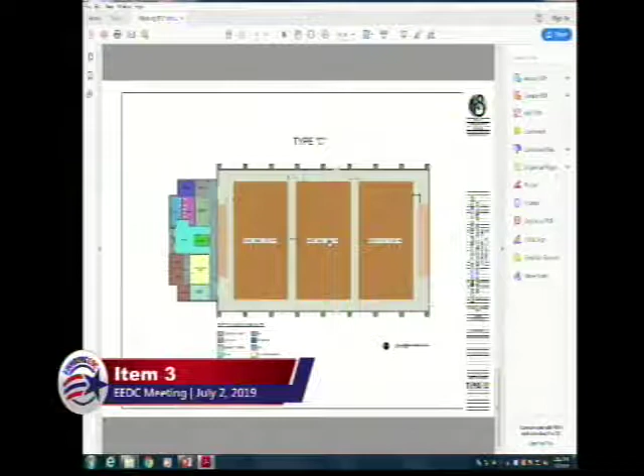And then type C, on your C rendering here, if you're playing on court 3, you're gonna have to cross all those areas to get back to concessions and stuff like that. So I think type A knocks everything out and spreads it all out, and it looks most feasible for what we want to accomplish.

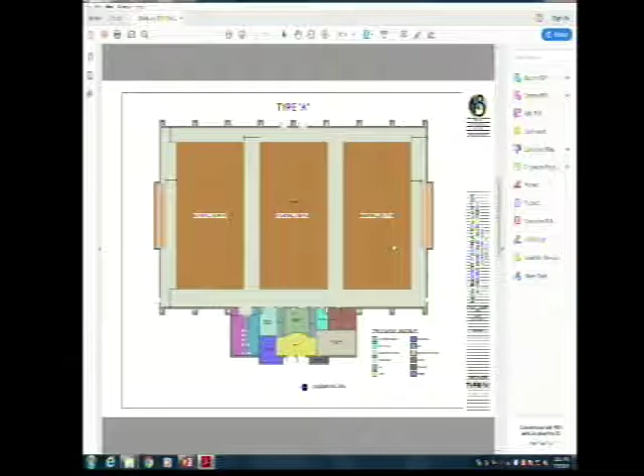Yeah, all 84. And the space that you have on the green sheet here, with the way you separated those extra areas into three, are A, B, and C all the same number of parking spaces, or do you have a number of parking spaces on each one? If you could throw that number out, please. No, not at this time.

Yeah, I like A because of the way you separate that. But then again, you have this little cross of traffic where kids are gonna be. Now the site plan can be modified, we can take that module of A and put it into B or C. I would like module A in C, that way you keep the traffic away from the future playscape, because if we put a playscape here and throw something out on these other quadrants, the coach comes out and says hey we're next, the kids see the coach and take off, and they're crossing streets. We don't need anything like that.

Type C kind of keeps everything on one side, and then you have all this open area to picnic and stuff. Mike, I heard you say something.

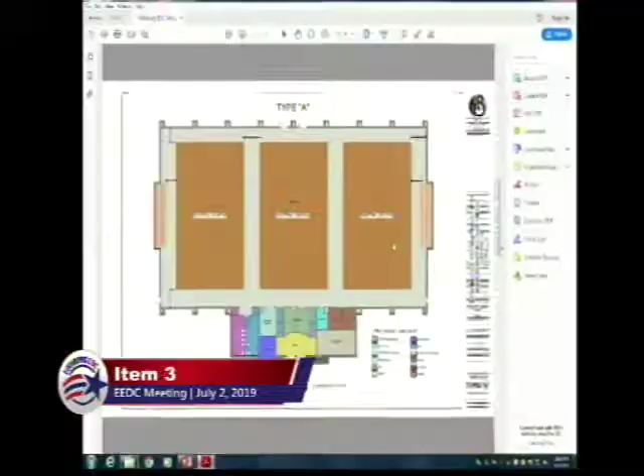Yes, I just wanted to make a comment. You're correct as far as liability is concerned with the children running back and forth, but I also really like how the facility is facing Veterans Boulevard. That's very important, because that's the most visibility we're going to get, the most traffic that goes through there. So as far as that's concerned, I would suggest type C, it's facing Sprague, but Veterans Boulevard is where you have all the traffic. It'd be great if you could center it there, so when people pass by they see this beautiful thing, for looks and visibility, so people know there's something new. And it's really symmetrical, I like the way it is in type A.

So basically taking the way it's situated with the entrance here and putting it there, still facing Veterans, with the entrance of facility type A to the west. What do you think, Coach? You think that'd be the way to go?

Mr. President, I have a question. Yes ma'am, go ahead. Is there a way to move the facilities, as far as the restrooms for the boys and girls, a little bit closer into the lobby area and not so far to the outside edge of the building? Yeah, we can flip it. What are these two?

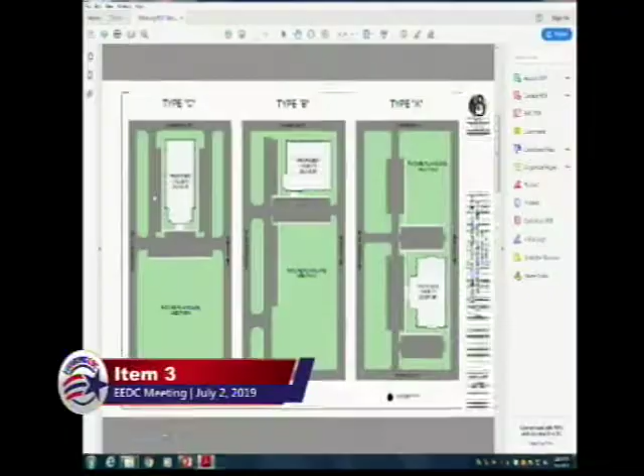That's the storage. Or is there a way to flip the equipment and the mechanical room to the edge? We can flip it, and that would put the mechanical and storage, which are not that vital, further away from the lobby. So we can flip it and do that.

I'm just saying, because when children are coming through the lobby, the first thing sometimes before they go to their games, it might be good that it's in the closer area facility for them. In other words, we can rotate it so they can access through the lobby, similar to the other one, and then the storage will flip over. Similar to what you see in B, where you're accessing it through the lobby, but keep the A configuration. We can do that, that's not a problem.

Mr. President, if I could just mention the restrooms here and the access. The other concern we have, as the mayor stated, was to have it used for other purposes. And I know that according to exits it dictates the amount of occupancy. Can you make sure we can maximize the occupancy? If it's just adding one or two extra exits, it's a minimal cost for the occupancy, so we can get the maximum capacity use of this place.

It has quite a few exits, but can you just double check that, to see if as far as the square footage the exits are, they're very important, especially the double exits. Really add those up, single doors could go to double, and that gives you a lot more people for minimal cost for the extra occupancy. Good point, Mike. That would be perfect going back to your type A scenario here.

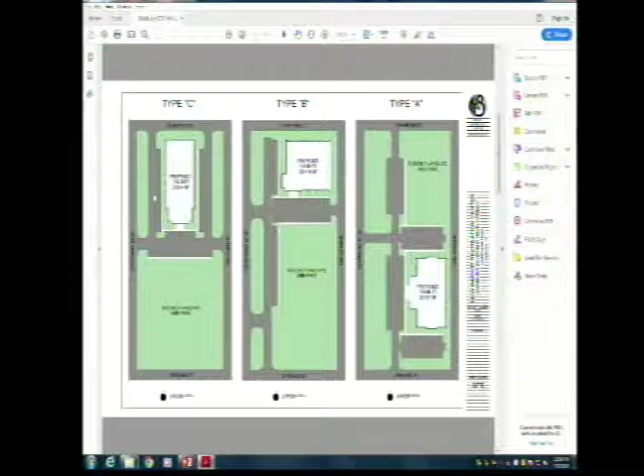The front of the building would be facing west, so we could throw an exit on the north and south side also, because if you put it into type C's parking lot here, that parking lot on the south will need an entrance on the side, since the main entrance will be in the front. And then in the back where you have parking, we'll throw one out towards Champion Street, that way if any issues arise, you don't have people bum rushing the two doors on the east side, and they can have exits all over.

Good point, Mr. Farias, thank you. Yes. David?

Good, I like all your suggestions. You ready to lace it up? Getting his Reebok pumps on. Ready to get started.

Any other questions, comments, anybody? Looks good, just some minor changes. And I know it says an action item, but I don't believe we're gonna take any action. They're going to submit another proposal, right? Yeah, they're gonna submit another proposal.

So let's take all these things we mentioned, try to have a final draft for us, and you'll get with Aaron and knock out everything on the contract, make sure we're on the same terms, and we'll go from there. We're not gonna take any action on this, but that's where it's at. So if you wanna visit with us again and make sure we get everything, because I already tore up all your notes here with the circles and everything, we can get with it and get the numbers right.

That's a big thing, I know you're the second ones that have had a crack at this project. We had a real strict budget we were looking at, and we didn't want to go over a certain number, and the first guys were way out of the ballpark. They came back a second time and were still out of the ballpark, so we said you're just wasting our time. Now you're here, so we want to knock this out as fast as we can, because we're already behind on things we want to do.

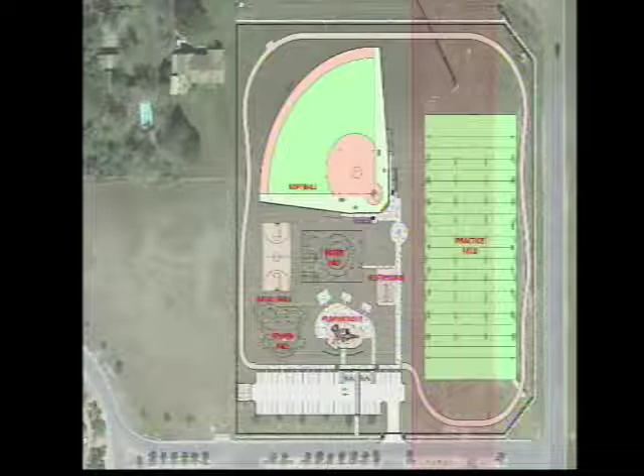One thing we also wanted to do in master planning this is leave space for, for instance, a splash pad right here, and also a future skate park. This one is very similar to the one located in Los Fresnos. And the splash pad follows the design that we've been doing here in the city, with two more under construction at this time.

But one of the things noted at the last meeting is, can we add some more items? So what we did is reconfigure it a little bit. For one, the restrooms, because we want to prepare for the future and having a splash pad, these restrooms could not accommodate that - these were just regular restrooms with concessions. We needed changing areas for the splash pad area, very similar to what the city is currently doing at their other facilities. So this follows that design.

In addition, I'll keep going back and forth a little bit so you can see - we added an area for future parking. One of the suggestions, especially having our experience at Vacker Park, was that it doesn't seem to be enough parking ever. So we needed a plan to make sure that in case we had a community event, there'd be areas to park. This being off the expressway, we certainly don't want people parking off the expressway to come into the park. So we moved the practice field a little more to the north, and we were able to fit additional future parking as a Phase 2.

The other difference is we're making accommodations for things like the splash pad. For instance, if we don't have the funding at this point for the splash pad in Phase 1, we're going to want to include utilities extended out there, since we're going to do all the groundwork. We don't want to come back and tear up a lot of what we've already got planned or in place. So we're also preparing our routes based on a location that was necessary, for instance the pump equipment - so that trail had to change a little bit in order to plan it better. And right in this area, it was suggested that we have a fitness court.

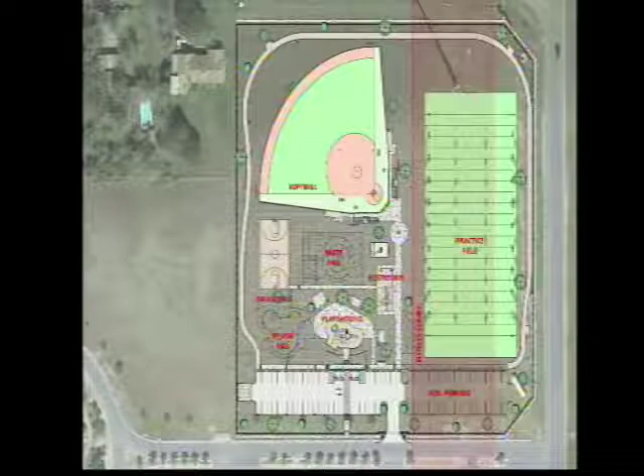The playscape that we've got proposed is very similar to Vacker Park. This is a picture of one. These are the restroom facilities. Again, it has a concession area, and then it has these family rooms for changing, including a changing station right in here.

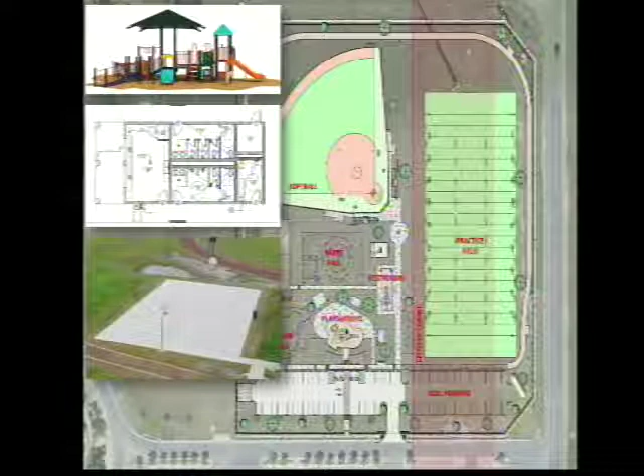Of course, it would be an open-air basketball area, the way it's currently slated. And this is a picture of the Los Fresnos skate park.

Now, these are high-dollar items. I think at the time they did this, about $250,000 was spent, but that was about 6 or 7 years ago. South Padre Island just opened bids on theirs, which is about half the size of this, and it came in at over $400,000. I think they're rejecting bids right now, is what we understand.

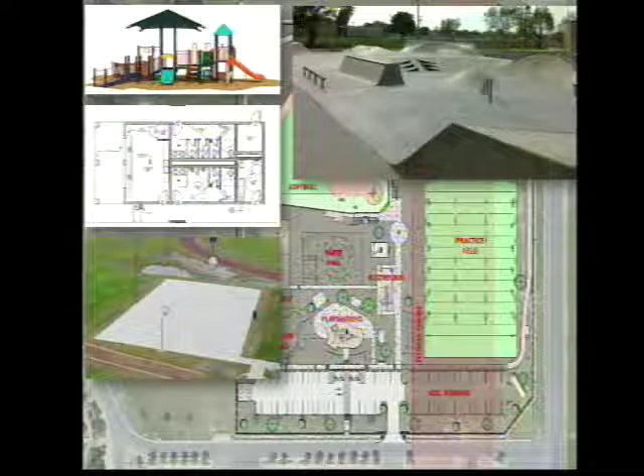And of course, the splash pad. This is similar to the type being installed throughout the city. And finally, this is an example from the company that does these fitness areas, with all the fitness stations along here. This is similar to what's installed in the Brownsville area.

It's going to have it all. It's got the room to have it all. The way we're master planning it, we make sure we extend conduit and power wherever we're going to need it, so that when we do install it, we don't have to go back and tear out landscaping, irrigation, things like that. We plan it, we have it there. It may be as simple as putting in the concrete pad, forming the pad, and electricity will be there, run to the controllers for the irrigation system, for the lights, things like that.

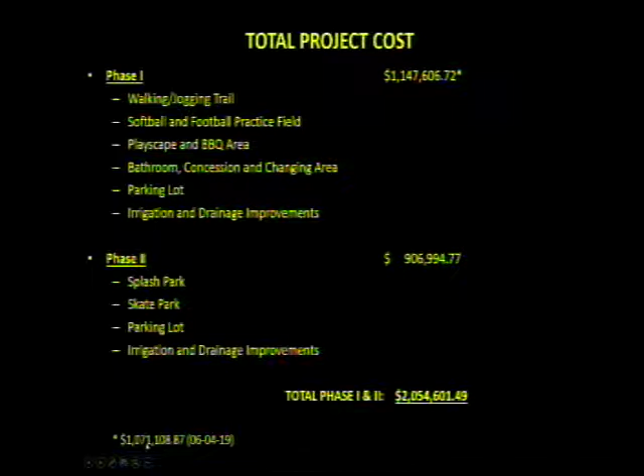So, of course, we get to cost. Phase 1, what was presented at the last meeting, June 4th, was about $1,071,000. That's everything, construction and all the soft costs. It's been modified a little bit to $1,147,000 to accommodate those additional utilities. That's why it's got the little asterisk.

Now, this is a budgetary figure. This does not take into account the opportunity that we may have to have the city do some of the work - for instance, some of the fill, some of the parking areas, some of the curb and gutter through some of their contracts. So this is just a budgetary figure if we were to outsource all of it to a private contractor. We don't want to assume anything at this point.

And of course, these are - I'm not going to say they're too conservative, but they're in the ballpark, pardon the pun. Phase 2: the splash park, skate park, parking lot, irrigation, and drainage improvements, about $906,000. These are high dollar items. For instance, the splash parks are running about $370,000 right now. The skate parks, like I said, anywhere from $250,000 6 years ago to what South Padre just had. We're not going as high as that, but we're staying around the $300,000 range for budget.

And then the parking areas - what I've given you is a detailed cost estimate. I know the last time Mr. Farias asked that we provide a more detailed cost, so we're giving you what we've done as a work in progress. So between the two phases, a $2 million facility - $2,054,000.

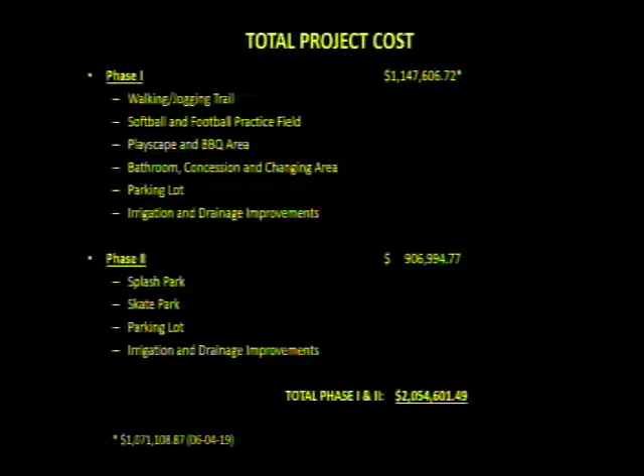Let me see if I have anything else. Nope, that's it. Go back to the big - I'm sorry, Mr. President, if I may. Go ahead, Mike. Go back to the big picture. There you go.

Like you said, it has it all. And it's a sizable investment, but the return I see in something like this is that so many families are going to be using and participating and being out there because there's nothing out there right now. And as far as the parking, it's hard to compare the parking here to Vacker, because at Vacker you have 3 or 4 baseball and softball fields, and they're having games back to back. Correct.

That's part of the issue with the parking, you've got 6 teams playing at the same time, back to back, so they're there before the game and after the game. Here you won't have 6 teams playing at once. As far as parking and the football field, do you always need 7-on-7 or soccer or something of that nature? When my kid was playing ball, I had to take him to McAllen to play 7-on-7 because we had nothing here, so this is encouraging.

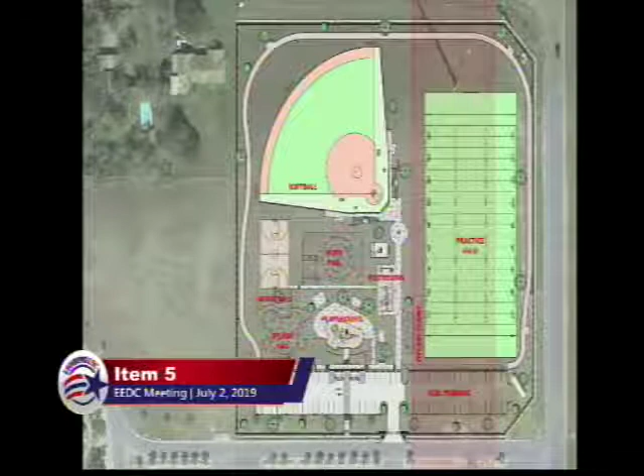But the splash pad, you pass by it and everyone wishes they could get in their bathing suit and under that water when it's 100 degrees outside. My wife always says thank the mayor for the splash pad, he turned on the water. It's amazing, now everybody can come and enjoy instead of going to Fiesta Texas or other places, they can stay in Edinburg and enjoy beautiful things like that.

For free, yes, it's amazing. That's one thing I learned coaching. You take the soccer team out to Cici's Pizza after the game and they've never been to a buffet, and they'll never go again if they're not part of the team. You're talking about families that'll never go to Fiesta Texas. This is their summer, and they take the kids every single day. So it's beautiful that we can put it out there towards the north.

So I know this isn't an action item, and I know we've been here already, Isael, so let's get it done. No more meetings, we're not going to see you up here anymore. Except at the bid opening, right?

One thing, the fitness court is not in your estimate, by the way. We did not include that in the estimate because we didn't have enough information. We've since received it. I think Coach Garza advised us it's around $120,000 to $130,000 for the equipment, if I'm not mistaken, for the fitness court, the equipment and all the amenities that go with that.